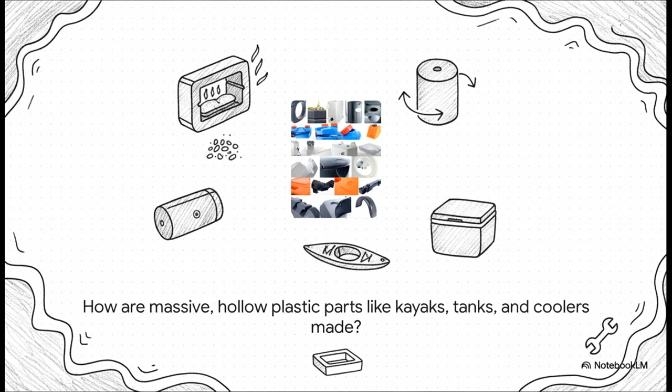So just look at this stuff. Kayaks, giant industrial tanks, those super tough coolers that you see everywhere. I mean, at first glance, you might think, wow, how do they even make something that big and complicated in one single piece? Well, believe it or not, they're all made using this really elegant low-pressure method. So what's the secret?

Okay, so here's how we're going to tackle this today. First up, we'll cover the basics. What exactly is rotational molding? Then we'll walk through the 4 main steps of the process itself. After that, we'll get into the nitty-gritty of materials and the molds you'll be using. And to wrap it all up, we'll talk about troubleshooting some common product defects. Sound good? Let's jump in.

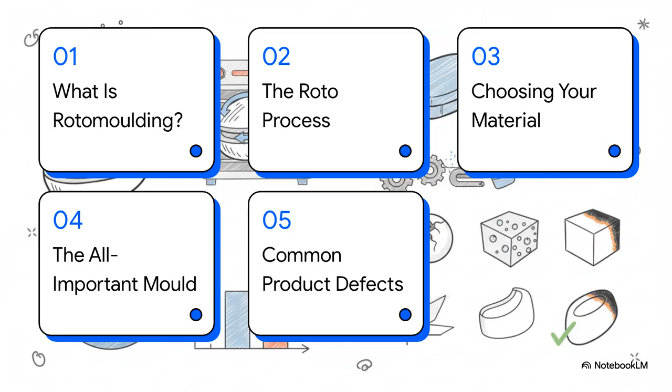So what's the big idea here? Honestly, the easiest way to picture it is to think about making one of those hollow chocolate Easter eggs, right? You have a mold, you put your material inside, and then you just swirl it around with heat until the entire inside surface is coated. It's pretty much that simple. The really key thing to remember is that this is all done with very low pressure, which, as we're about to see, is a huge advantage.

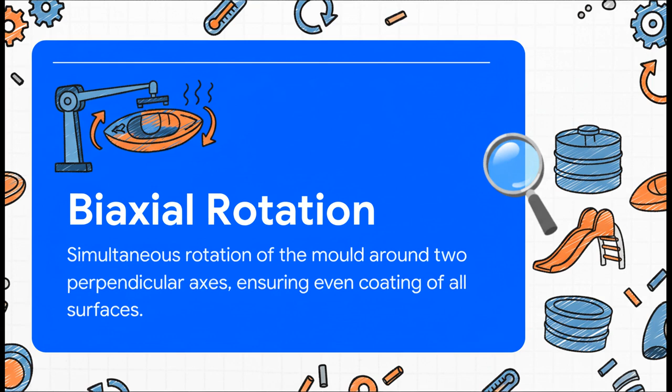But how do you get that perfectly even coating inside the mold? Well, that is the magic trick, and it's called biaxial rotation. Biaxial just means it's spinning on 2 different axes at the exact same time, kind of like the Earth spinning on its axis while it's also revolving around the sun. It's this complex tumbling motion that forces the melted plastic powder to get into every single nook and cranny, building up these beautiful uniform layers.

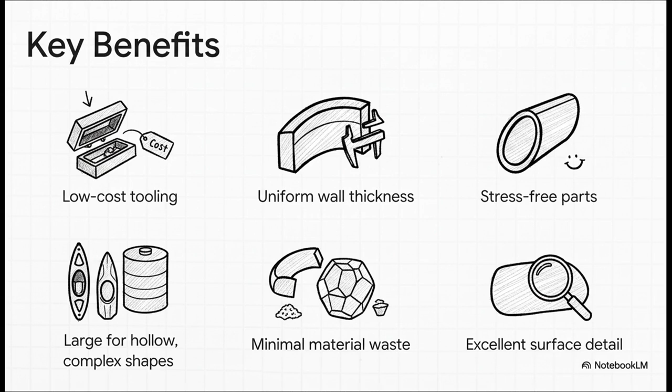Now, as a future technician, this is super important. You need to know why you would pick this process. And since it's low pressure, the molds don't have to be these massive, expensive fortresses of steel. That makes the tooling way, way cheaper, especially for large parts. Plus, you get these incredibly durable, stress-free parts with even walls, which means they're much less likely to crack. It's a real win-win.

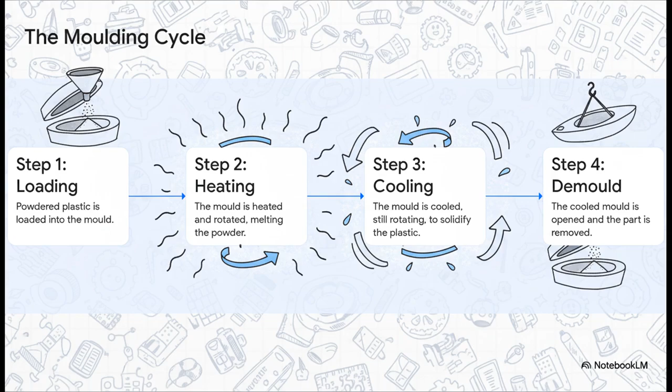Step 3, cooling. The mold comes out of the oven, but it keeps spinning. That's key. And it's cooled with air or a water mist to solidify the plastic. And finally, the best part, step 4, demolding. You pop open the mold, and out comes your brand new one-piece part. Pretty neat, huh?

But, you know, a great process is nothing without the right material. The plastic you choose is what gives the final product its personality. Is it going to be flexible, super rigid, able to handle extreme heat? It all comes down to the material. And when it comes to materials in the rotomolding world, there is one that absolutely dominates. I mean, look at that.

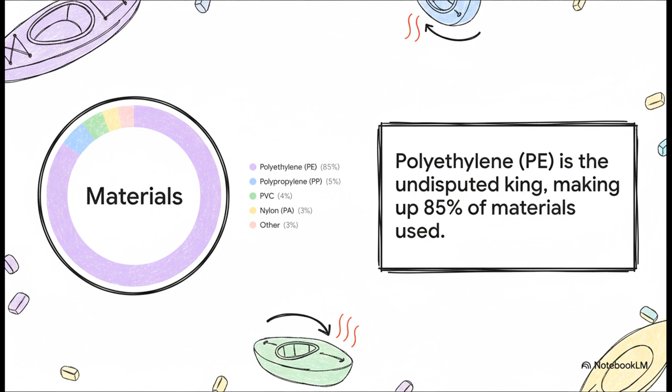Polyethylene, or PE for short, is the undisputed king of the castle, making up a whopping 85% of all materials used. And it's no surprise. It's tough, it's forgiving to process, and it's cost-effective. It's the ultimate go-to material.

But polyethylene is really a family name. You're mostly going to encounter 2 types, LLDPE and HDPE. Think of LLDPE, that's linear low density, as the tough but flexible one. It's got amazing impact resistance, which is why it's perfect for a kayak that's going to bang into some rocks.

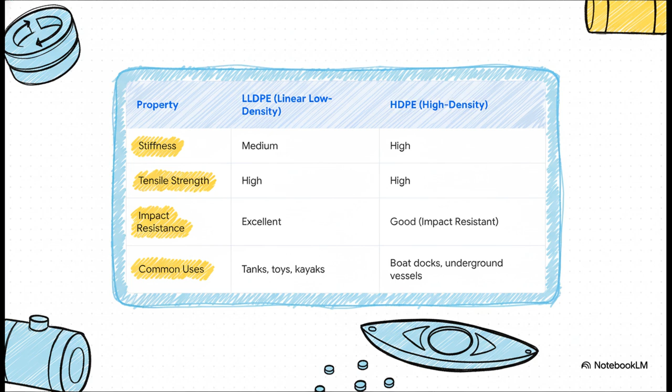Then you have HDPE, high density, which is the strong, rigid type. You'd use it for things that absolutely need to hold their shape, like a boat dock or a large industrial vessel. But here's where things get really exciting. PE is the workhorse, for sure.

But check this out. Advanced materials are completely changing the game. This chart compares the stiffness of PE to polyamide, which you probably know as nylon. It's literally 4 times stiffer. What does that mean? It means you can design parts that are way thinner and lighter, but just as strong, and they can handle more heat. This is a massive deal for industries like automotive, where every gram counts.

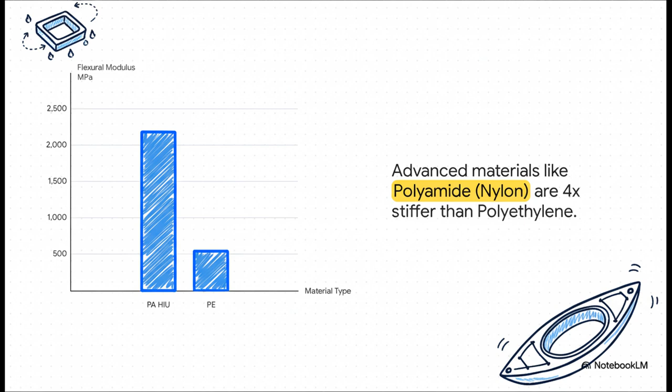Okay, we've talked process, we've talked material, but what actually gives the part its final shape and texture? The mold, of course. The mold is everything. Its surface becomes the part's surface. Its shape becomes the part's shape. So let's dive into the world of tooling. And you've basically got 2 main choices here, and your choice has a huge impact on the final product.

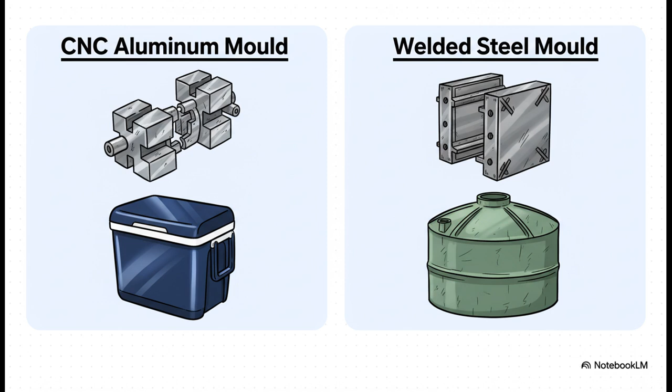On one hand, you have beautiful CNC machined aluminum molds. They transfer heat like a dream, which gives you that amazing high-gloss finish you see on a premium cooler. But they're expensive. On the other hand, you have welded steel plate molds. They're cheaper, easier to modify, and perfect for big, simple things like an agricultural tank, where a perfect surface finish just isn't the priority.

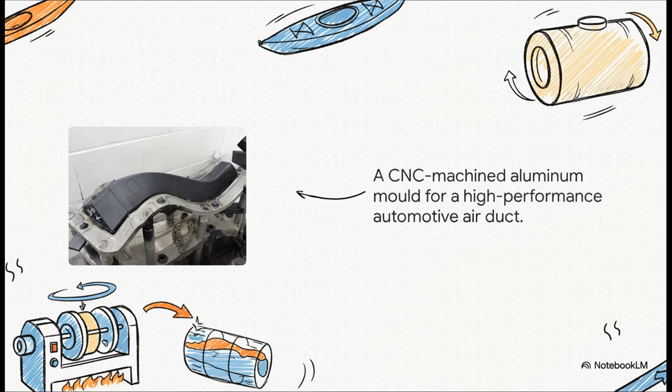And this picture really says it all. This is a mold for a high-performance automotive air duct. Look at those curves, that complexity. There's just no way you could get that kind of precise geometry with a simple welded steel mold. This is where CNC machined aluminum truly shines and opens up a whole new world of design freedom.

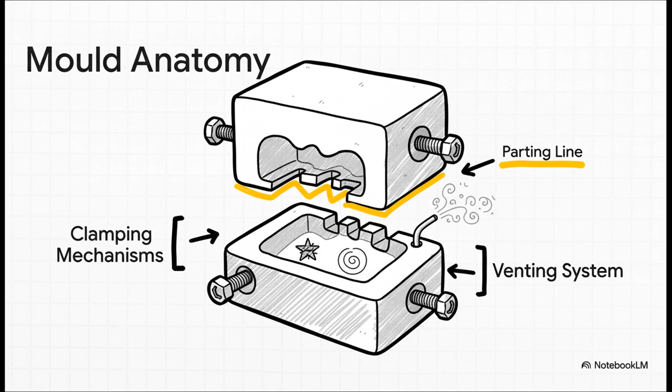Now, for your diploma, you definitely need to know a mold's basic anatomy. You've got the parting line. That's just where the two halves meet. You have clamps to hold it all together. But I really want you to pay special attention to the venting system. This little tube is absolutely crucial. See, when you heat the mold, the air inside expands. If that hot air has nowhere to go, it's going to cause all sorts of problems, like ugly bubbles or a warped part. That tiny vent prevents all of that.

All right, let's switch gears and talk about troubleshooting, because, let's be real, things don't always go perfectly on the factory floor. A huge part of your job as a technician will be playing detective, identifying what went wrong and knowing how to fix it. So, what are the common problems you're going to encounter? Even with a process as robust as this one, you're going to run into a few common headaches. These are the big four you'll see time and time again.

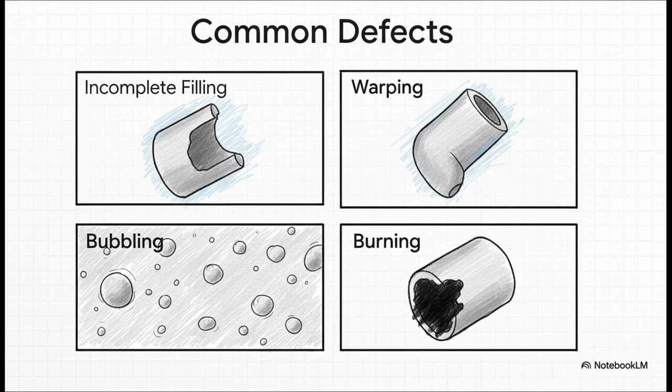Incomplete filling? You probably didn't put enough powder in the mold. Warping? Your cooling was likely uneven. Bubbles? Check that vent we talked about. It's probably blocked. And if you see a burnt, charred spot, well, you either cooked it too hot or for too long. Each problem gives you a clue, and it almost always points back to your process, your material, or your mold design.

And here's a pro tip. Probably the most important one for preventing defects. Think ahead. Good design is your best friend. Look, plastic powder does not like sharp internal corners. It has a tough time flowing into them. But by simply designing with nice, generous, rounded corners instead, you make it so much easier for the material to flow evenly. It's a tiny design choice that makes a massive difference in the part's final strength.

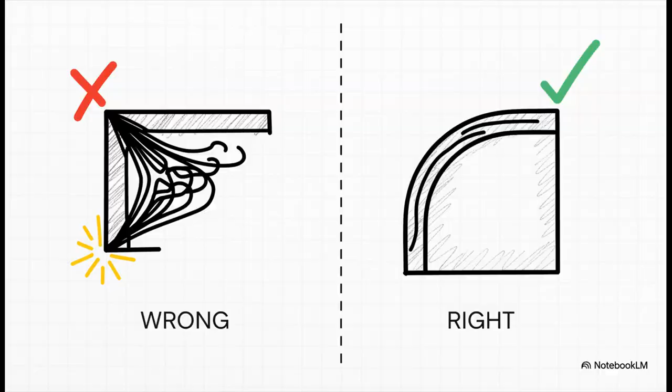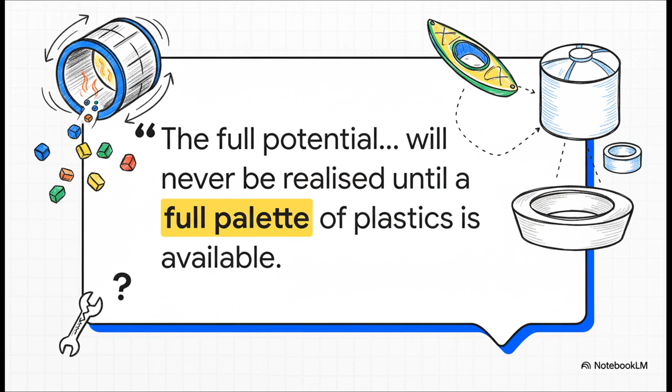So let's end with this thought from Professor Roy Crawford, a true pioneer in this field. He basically said that the full potential of this process is locked behind the materials we have available. We already saw how materials like polyamide are starting to change the game, but that leaves a question for you. As the next generation of technicians and engineers, with new materials being developed all the time, what new products will you help create with this incredibly versatile process?